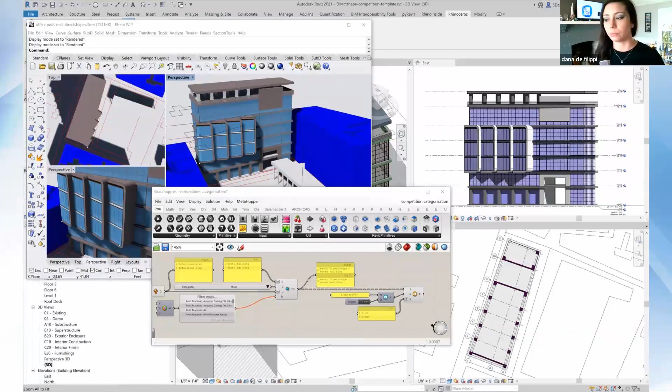So without further ado, today we have a really, really awesome presentation. Very, very excited about it. Rhino Inside Revit. And today we actually have 2 from McNeel & Associates.

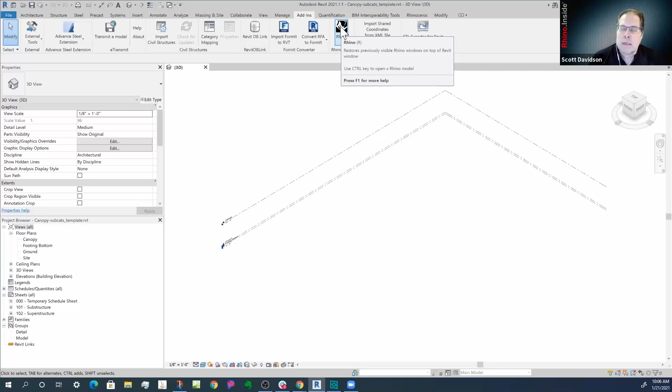Once you click on this, it'll go through the process and try to load Rhino and Grasshopper inside Revit's memory space. If it's successful doing that, it will come up with this toolbar, and there are different things you can do here.

You can start Rhino, which we're going to do here in just a second. We can import 3DM files directly using our 3DM importer as opposed to the one that comes with Revit. We can categorize things and put different direct shapes and categories, and we can turn off and on preview.

We can actually edit Python here. This is the Rhino Python editor, but it can access both the Revit API and the Rhino API simultaneously. So you can write Python scripts that include both APIs and both calls, and you have the whole Rhino geometry kernel available to the Revit API in Python and in C#. So we can start Grasshopper and some other pieces here.

We also have what we call a Grasshopper player, which some of you might be familiar with as players in Revit, so you can write commands with Grasshopper and just play them. Another important piece is that PyRevit has the ability to make custom toolbars, and those can include both Python and Grasshopper and Dynamo scripts. So you can create your own custom toolbars with all your custom routines using PyRevit and Rhino.Inside.

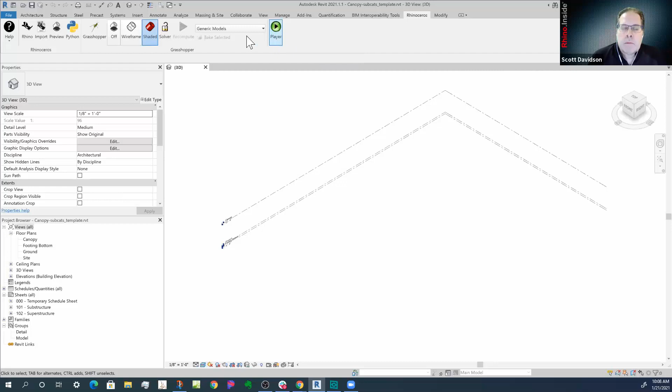Let me show you how this works really quick. When you start Rhino, you hit here and it starts up Rhino. This is just standard everyday Rhino 7, but it does know it's running inside of Revit. When I start up Grasshopper, there are a few new toolbars that come up when you're inside Revit. So this is Grasshopper running inside Rhino inside Revit, and it starts to understand the stack there.

You can see we have Revit primitives here, different kinds that we can access directly through Grasshopper. We also have a Revit Toolbar that comes up, which has things like being able to add beams and columns, deal with categories, create direct shapes, deal with families. We can interrogate elements, and we have a really extensive way of working with Revit materials directly, so you can actually use Grasshopper as a material editor in Revit, which is kind of fun.

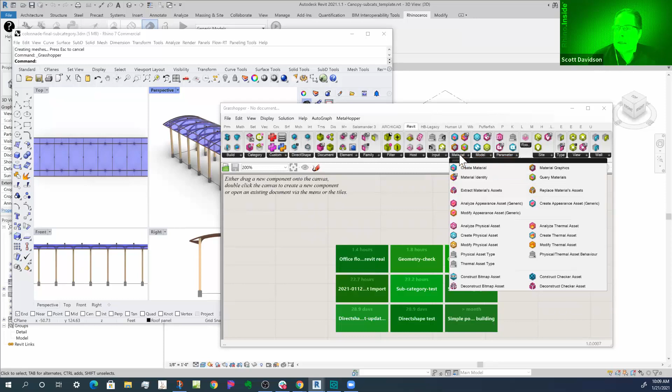We can deal with parameters and different types here. We have a whole section on walls because walls themselves are a fairly sophisticated category or family, so they have their own piece here. But these are things that we continuously add to, so there'll be more and more of those. That's where you find how you can do things in Revit.

Let me open an example here so you can get an idea how this works. I think we'll start with this one.

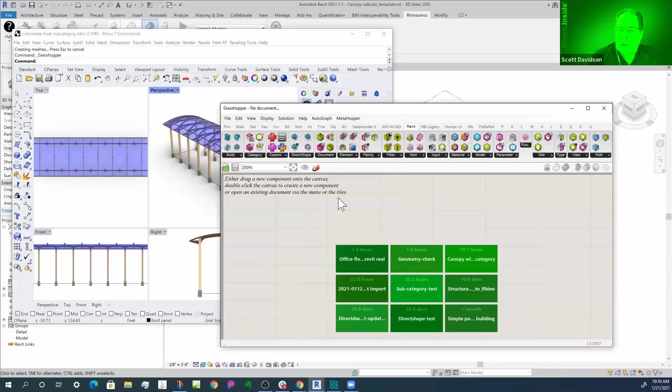One of the things we're trying to solve from the very start of this was people wondering, how do I get my Rhino geometry and move it into Revit? A lot of people use Rhino for design, so this was the initial question, and we can do that in a number of different ways.

This is one of the nice parts about this connection, you can do it with direct shapes. I have examples where we're throwing 100,000 elements into direct shapes. It's very quick, and you can use them in drawings really quick, for a competition or something like that.

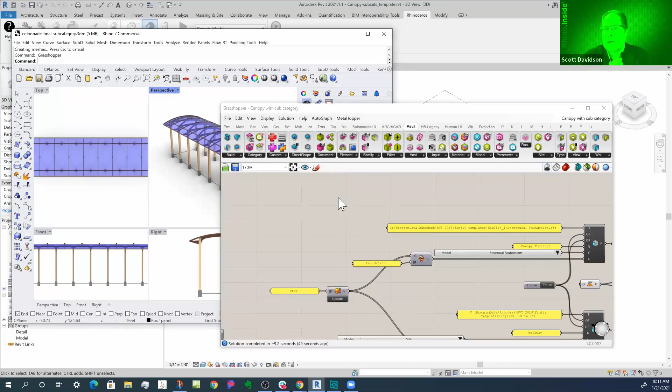But we can also be more rigorous or intentional on how we get things across. In this case, let's say this is a canopy that's custom built, and it's going to be dropped out on site.

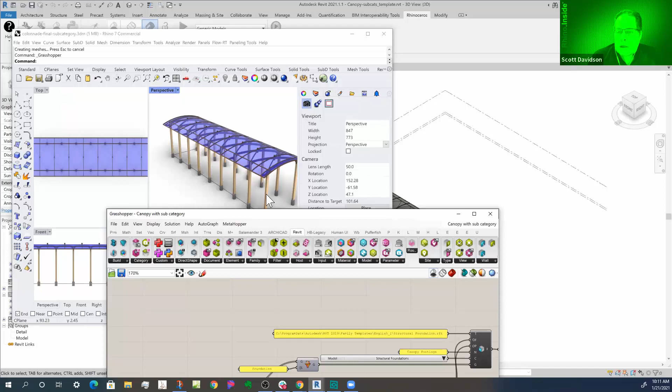One of the things I need to do is I have these footings that we need the footing person to put in, and then we're going to have this other piece fabricated and drop that in. So the Grasshopper definition can actually reflect that.

I'm using Elefront, which is a plugin for Grasshopper that's free. It goes through and allows me to select objects by type over in Grasshopper or Rhino. In this case, I'm grabbing all the B-reps.

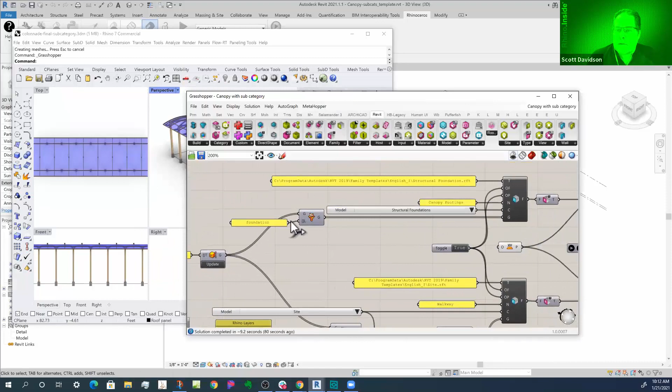I'm finding everything on the foundation layer, which are all these concrete pieces there. Then by going to family here, I can create a new component family. The new component family is going to be a structural foundation template.

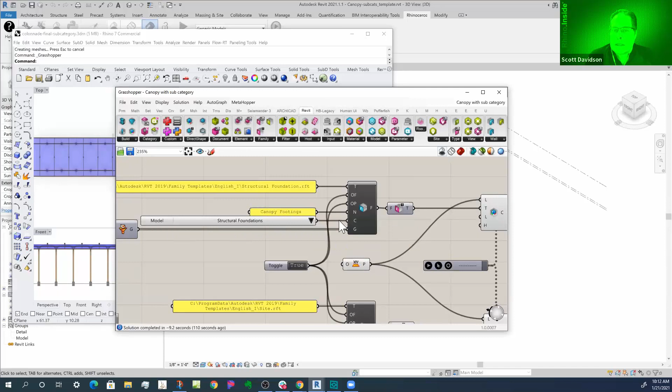You can see that, and it's in the structural foundations category. Then it's named canopy footings. So what it does is it takes all that geometry and wraps it up in a new family.

Of course, those of you familiar with Revit know that you don't insert families, you insert types. So we have a little unit here that goes and finds the types in this family, which is only one because it's a component family.

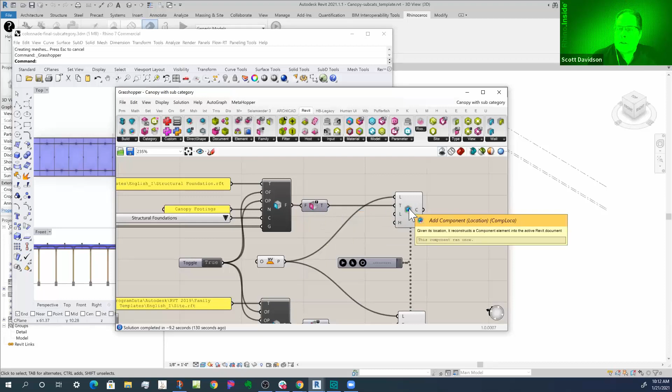Then what we can do is insert that family into Revit. You can see here that we have these footings here, they're a component family.

Each one of these could have been an instance of a single type, but in this case I was lazy and made them all one. But you can see we have the canopy footing here.

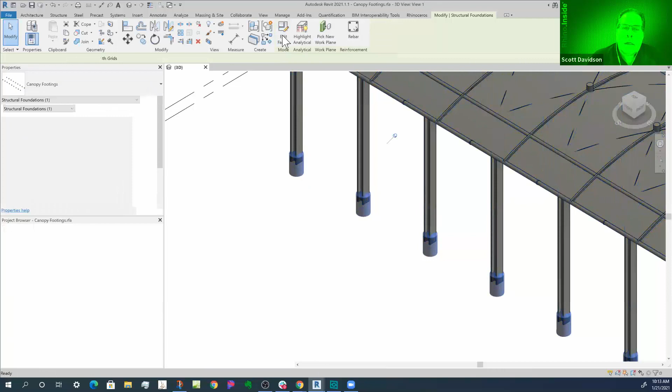It's a structural foundation type. What's really interesting here is because these are B-reps in Revit now, I can actually edit this family. I can grab these objects, and there's some light editing I can do to these, even if Grasshopper and Rhino weren't around - I could do this.

Now I'm not going to save this change because Grasshopper is in control right now, it'll just change it right back. And I can disconnect that connection. But you can see that I can make real families with real geometry through this.

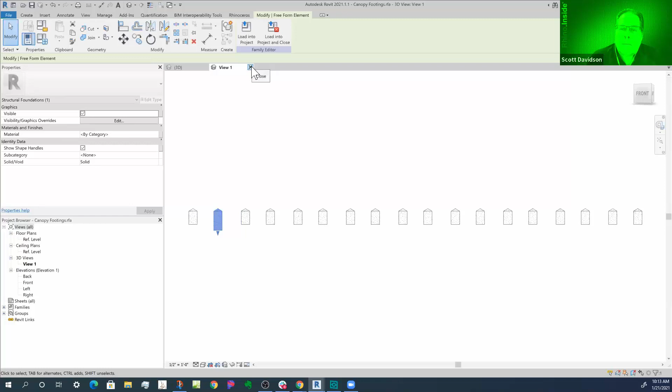I'm just going to close this, and we'll get back to the overall model, hopefully. So there we go. Now let's take a look back at a little bit more about this definition.

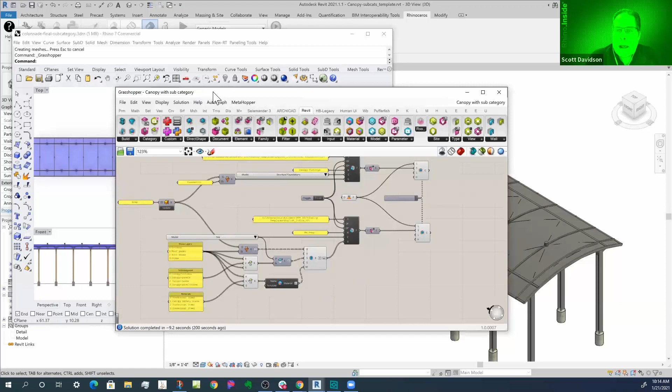I'm over on this side, and there's a lot more happening in the rest of this. I've got some roof panels and some columns and things like that.

So what I can do here is, using Elefront and some other filtering, we can go through and I can say, here are the layers of the objects in Rhino. Then I can map those to subcategories in Revit, and here's the subcategories I'd like to use.

In fact, I can actually assign materials to those objects too. I do a little sorting of those, and then I can create the subcategories if I need them.

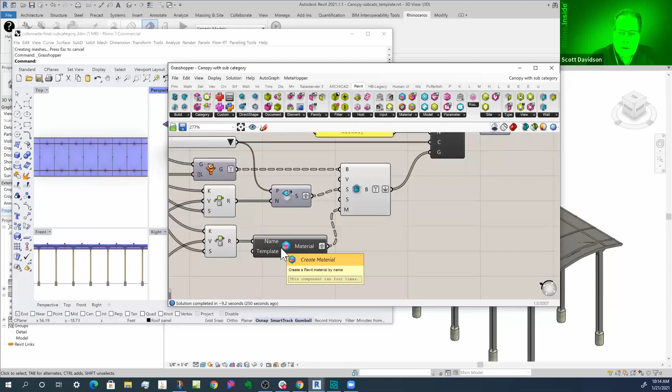I can also create the material names if they don't exist, they'll get created. Then I push those all into essentially a form mixer, which mixes all the subcategories with the forms and all those pieces.

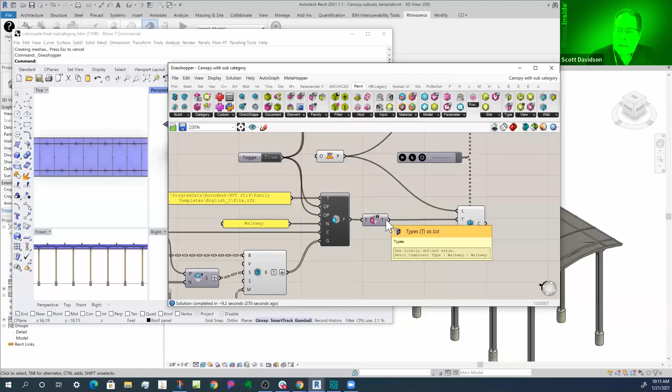Then we get to the family again, a new family. This is on a site family because I'm going to use subcategories, so I need a category or family I can use subcategories on. We're going to call it walkway. I mesh that all up, find the type like I did before, and insert it. What I get over here is a family with all the different subcategories and pieces like that.

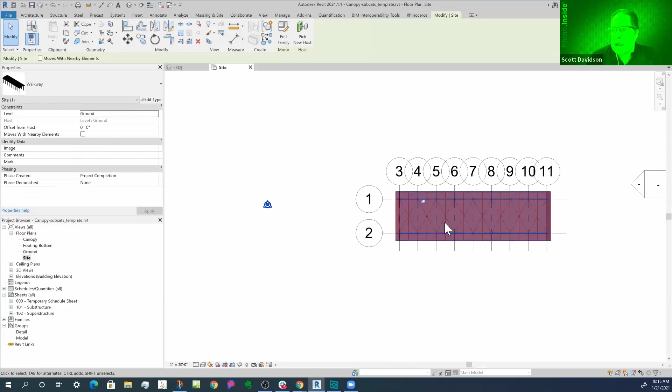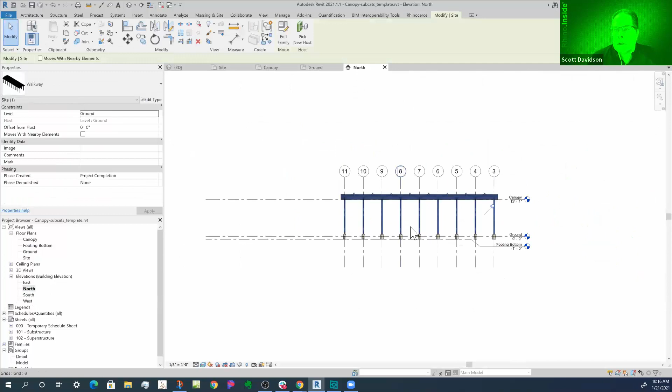You can see what I can do here is go through and, using subcategories, let's see what I get here. I can go through and actually change graphically how these things look, based on the different subcategories and using view filters and all those things. You get to really start to inform the model, the BIM model, create the BIM model in a way that works well in your Revit schema.

That's one of the big advantages you have here. And of course that can change over time - you might have floor plates that are going across and are official, but you might still be working on the facade. So the facade might be direct shape objects which you're going to just use temporarily until the facade kind of settles down in the design. So there's a lot of options here for your workflow.

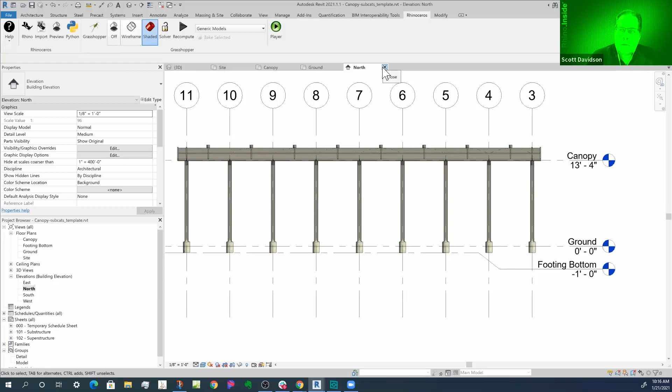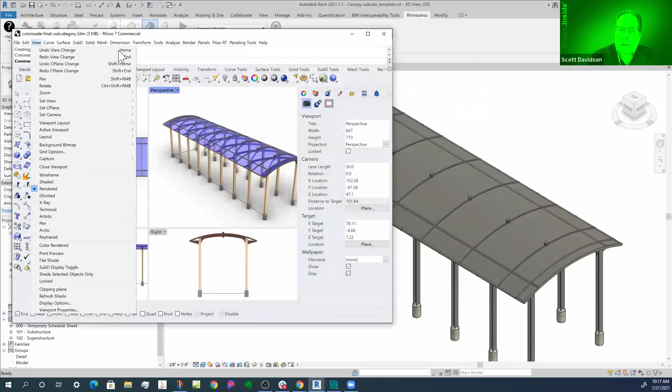Now, we don't just do forms and we don't just do direct shapes. We can also drive native families, system families. So I'm going to just jump out here and show you how we might do that a little bit. I'll close this, and I think we'll leave that one open for right now. Let me close this and get on to a different template here.

So when you move on to doing native objects in Revit, a lot of times instead of just moving the geometry over, you're actually going to move a piece of geometry in Rhino over that has - and by the way, this is not just the geometry, this is all the parameters too. So you can add all the data that you want from the Rhino model into the Revit model if you want. But you might just move a curve over, for instance.

So let's open that up a little bit and take a look at that. So I'll open, let's do - yeah, that looks about right. All right, so you can see here, instead of having all the geometry or the final geometry, we just have some curves and points and things like that.

And so I'll go to a different way. This one's going to, instead of just taking geometry over and making families, it's going to go and actually drive some pieces, some native objects, some system families. So in this case, I'm going to take some floor curves and move along here, find all the curves on floor and all the curves on roof. And then what we're going to do is I'm actually going to find the name on those curves, find the elevation of the curves, and create a new Revit level.

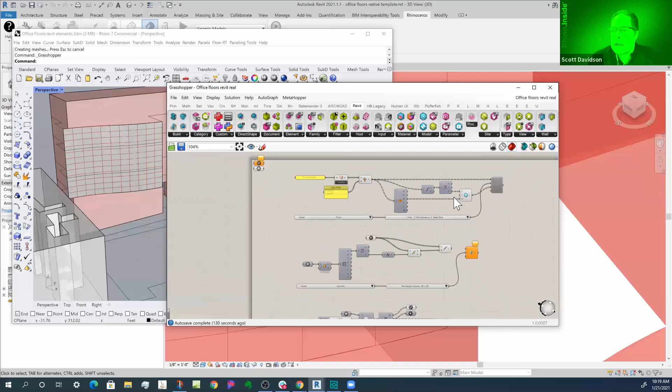So we go over here - I have our level. I can add a level and then it creates that level, named that. And at the same time, it's going to create a floor, which is a native floor using a standard type in Revit. Here's all the types that happen to be in this model. And then I'll just enable this here.

And so it's interesting what happens here. So it takes those curves, which I could have picked, but I just filtered form on the layer. It creates those curves, or it takes those curves, it creates the native floors in Revit here. You can see they're native floors. You can't tell that these weren't just created by hand in the first place, actually, except Grasshopper's in control at this point.

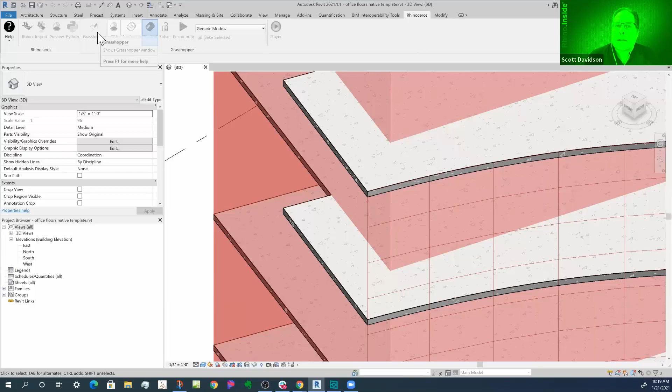And what's interesting too is then those floors are actually previewed back in Rhino. So the curves are in Rhino, the floor is created in Revit, exists in Revit, and then it's previewed back in Rhino, which is kind of fun too. So you can see how they're both updated all the time.

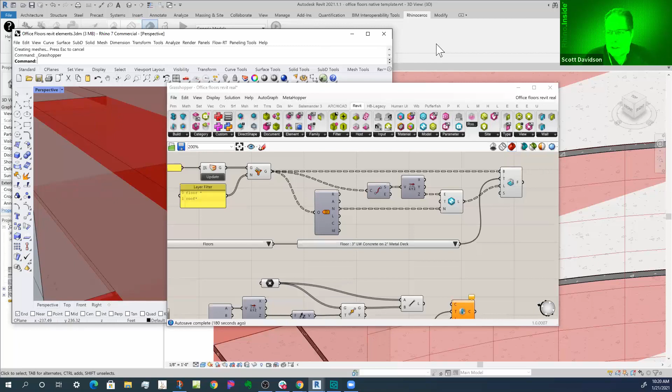What's nice about this is, if we were to disconnect Rhino and Grasshopper from this and somebody wanted to change this, I can go and, like I did before, pick on this. I can go and edit this floor. Let's see here.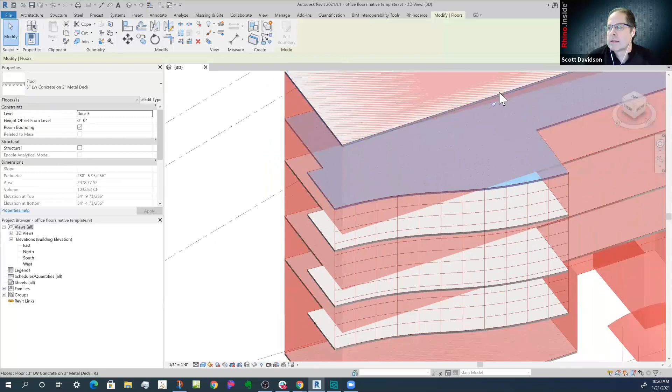Oh, I can't edit the floor right now because... Scott, I think you have to unpin it first. Oh yeah, thanks, I got to remember all these things. That's an important piece of this: when Grasshopper creates objects, everything in Revit is pinned. So if you want to edit it, you unpin it, and that way you can get to it directly.

Then we can edit the boundary, and you can actually see if I click on this, it gives me the dimension, and I could edit that, and it actually edits with Revit. That originally, of course, was a Rhino curve. But let's say you disconnect Grasshopper and it's gone downstream in the project further, you have this kind of ability depending on how you make the thing.

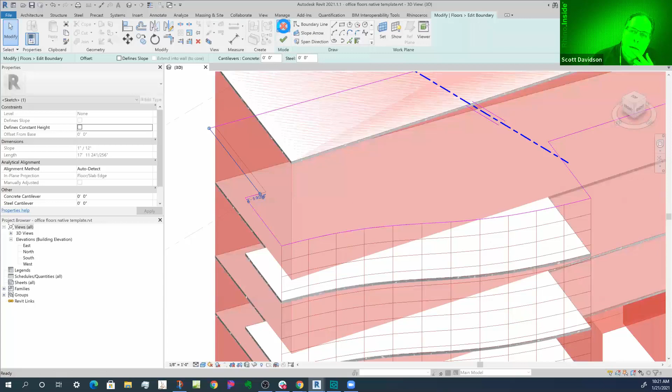I'm not going to save that change because Grasshopper is actually still in control. But we're just going to do that, and I'll cancel that edit. But that is the kind of level that you have.

So we can do floors, and these levels here were created by Rhino and Grasshopper. Grasshopper named them and created them on the fly, so you can keep all that in sync. This also goes the other way - you can take levels and bring them into Rhino if you want to, all that kind of stuff.

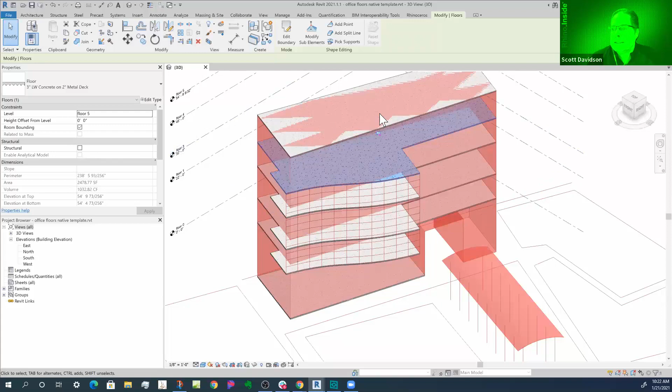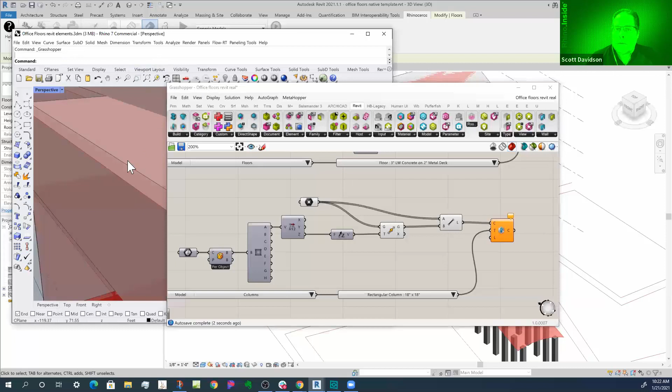Just the last piece I want to show here before we get to your questions and answers, because we want to make sure you have a lot of time to do that. We can do things like take some points out of here and create some columns with them. The points that were in Rhino, you can see right here, just created the columns.

What's fun here is if I'm in Rhino and I edit this roof height, you can see that the columns in Revit respond. So you can set up some active ways of these two working together.

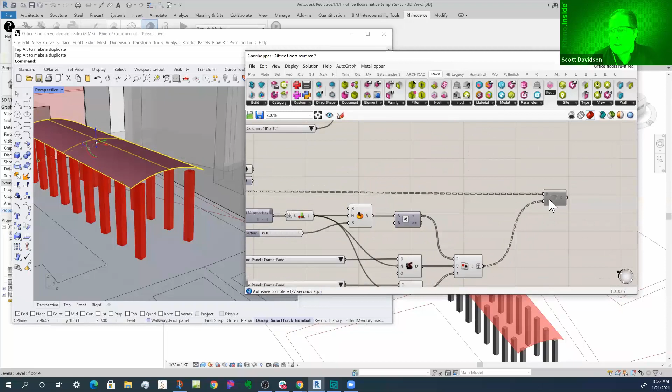Another way you can do this is if I want to drive adaptive components, we'll just go in here and I'll enable this. So we can drive adaptive components through Grasshopper.

And that'll just take a second to populate. And so you can see that in Grasshopper, or in Revit, the adaptive components were created here.

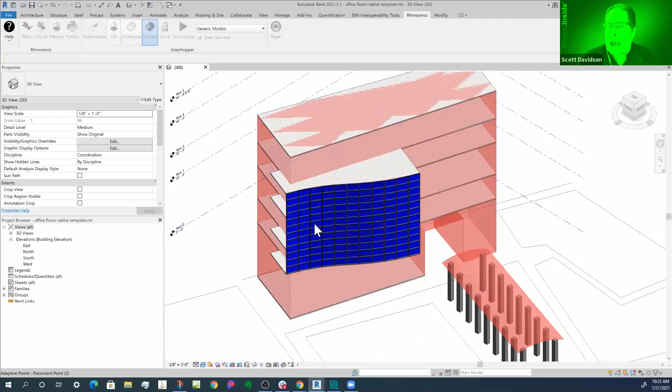Excuse me. And then if I come in here, we can have some fun with this. These are previewed. Instead of using the same adaptive component, what I can do is have Grasshopper randomly place two different adaptive components.

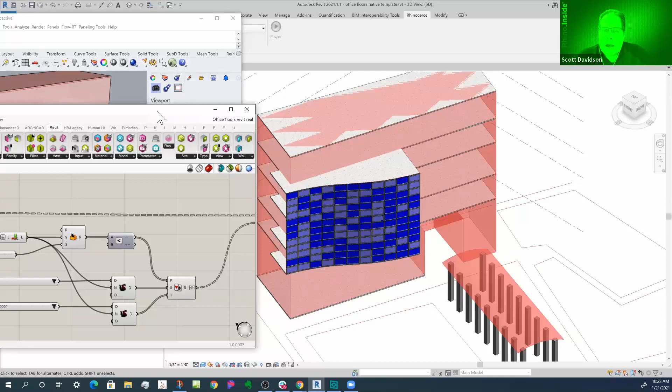You can see it can just randomly do this, or you can have it react to where it is on the facade and have Grasshopper select different adaptive components on the fly and edit those things. I have a little slider here that will look at different random patterns you can go back to. So in this case, this is Grasshopper driving Revit's adaptive components in real time.

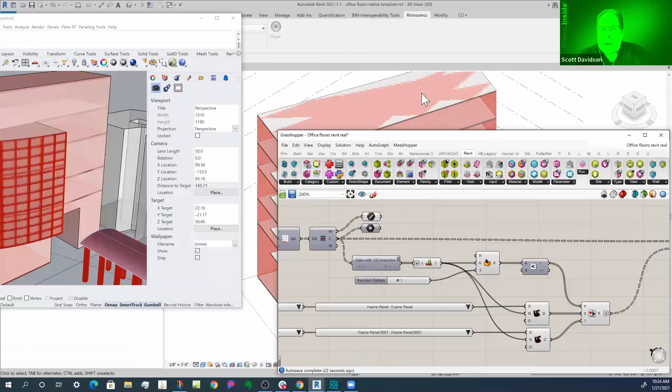There's a lot of options here, but what's nice about these methods is these are system families, standard Revit system families, creating real Revit objects. So Revit's doing the generation of the geometry, and then all the parameters that come along with it - that's all possible. So that's just a quick overview of some of the things you can do.

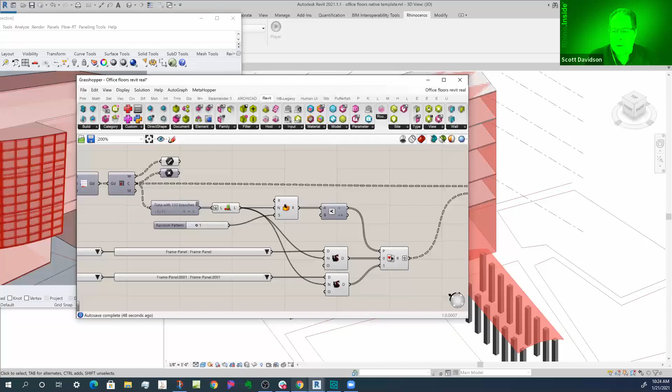If you're interested in more of this, the Rhino.Inside.Revit website is the place you want to go. I want to point out a few different places - there's the Getting Started article, that's where you can get it started, talks about install. There are guides - these guides talk about, for instance, how we deal with walls in Revit, how we deal with doors and windows, adaptive components, rooms, areas and spaces. We're still working on this website, but from right here there's also Rhino to Revit.

This is the most popular guide by a long shot. It talks about how to create direct shapes, how to create loadable families with subcategories, and how to do native Revit elements. A lot of what I showed here today is in this guide.

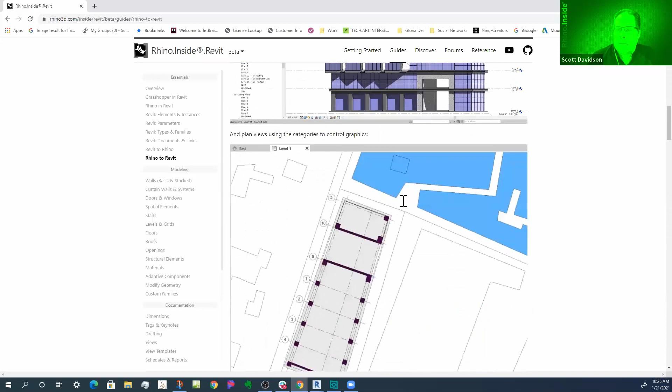You can go through this guide, and it also talks about the different pieces and what you can do. I highly recommend, as you're exploring this, get to this guide, and you can work from there.

Another thing we have, which this video may end up on at some point, is if you go to Discover here, there's lots of different resources from people in the community, different demonstrations, different tutorials, different discussions about how it's useful, all those kinds of things. Some people you will recognize because they've been on your cast here.

We continuously are adding to this, so that's the Discover page, a great place. You can see that Marcello, who talked about this a few months ago to all of you, has a Dynamo and Grasshopper for Revit manual, which includes Dynamo too. That's right here, but there's a lot of other resources too.

I just want to make sure people knew what the important selections were. The forums, if you want to get a hold of us, are right here, and we're on the forums all the time. So anyway, that's what I have for this presentation.

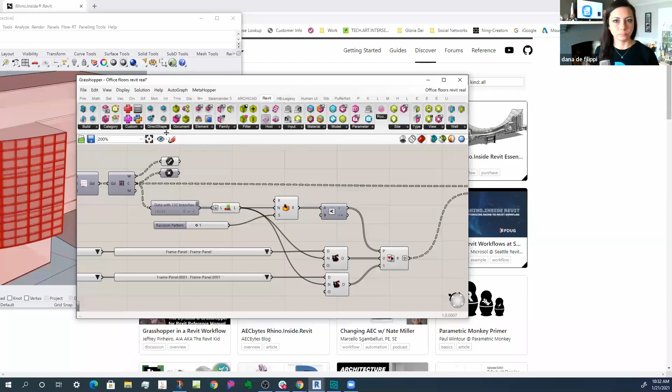Somebody's asking, confirming Rhino Inside only works with Rhino 7. So Rhino Inside depends on a new piece of technology that's introduced in Rhino 7. It's not going to work with Rhino 6.

The developers for Rhino 7 sort of took apart a good piece of Rhino and put it back together in a different way, so it could be embedded in other applications as well as an add-on. Rhino Inside Revit was built on this technology available in Rhino 7. It's really asking Rhino to load itself inside the Revit environment, and it also launches Grasshopper. This Rhino Inside Revit piece is really the add-on for Revit that can talk to the installed Rhino you have on the machine, get it to load inside Revit, load Grasshopper, and it also adds all these components that Scott showed you. These are the components that come packaged with Rhino inside Revit to support Revit workflows inside Grasshopper.

We joke about it all the time, but there's a little secret: Rhino actually is Rhino inside Rhino. It calls itself to load itself. So what's nice is that all the technology we're using for Rhino inside Revit is something that we use ourselves for Rhino, and so it allows it to get tested and keeps it up to date, which is really nice.

There's another question about work sharing that Dan is asking. These same work sharing rules apply. As Scott showed you, our focus with Rhino inside Revit is to build as many components and workflows that support creating and querying native geometry in Revit. So the goal is not to bring all these crazy shapes and geometries inside Revit that Revit really doesn't understand. The goal is to give you the amazing Grasshopper and Rhino geometry engine that exists outside of Revit, bring it inside the Revit environment so you can use this visual programming language and geometry engine to generate a lot of the content you need inside Revit automatically, all the walls, levels, floors, and all that kind of stuff.

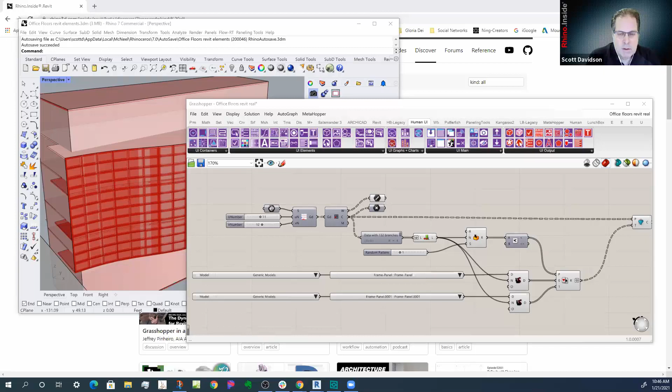So if you install and take a look at Rhino inside Revit, all the components we have in the Revit tab, you'll notice we have a lot more query and analysis components compared to create components, as we like to call them - components that let you create native Revit content inside Revit documents. We have plenty, but there's still a lot of work to be done in that department.

Part of the reason is that getting stuff inside the Revit model in a way that Grasshopper can drive it, and is intuitive for the user, so they can tell Grasshopper, hey, it's okay, I can take care of this piece of content from now on. And also, when another instance of Grasshopper opens on somebody else's machine, it can recognize that piece of geometry, that piece of model that is Revit native, is not something Grasshopper itself creates - it asks Revit to create that. So that has always been a challenge.

We're calling this feature element binding - the way Grasshopper remembers the content that it creates. This feature is in the testing phase, so we should be able to publish it out soon. Once this feature is inside Grasshopper, we'll be able to focus on a lot more create components, because now we have element binding as a backend, and it would be accessible to all the scripted components we have.

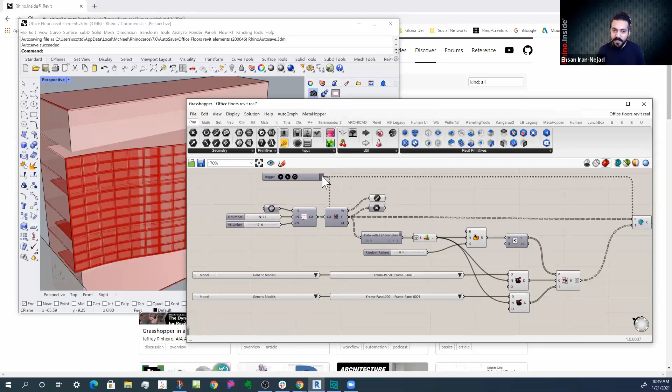Scott, do you mind showing them the trigger component that's new to Grasshopper? So this trigger component, I think inside utilities, this one - you can tie it to any other component in Grasshopper, and it specifically works very well with Rhino inside Revit aware components. It ties the actual function of that component to that play button that's there.

So you can do a whole lot of calculations and geometry modeling inside your Grasshopper definition, check it out, make sure it's good, and then hit play and let the rest of the definition take care of building all that stuff inside your Revit model. You can nicely separate these two pieces from each other, or have multiple pieces even inside your definition. So Revit isn't a bottleneck all the time, because it takes more time for Revit to generate this stuff - you can play with them a lot faster in Rhino and just click on it when you're ready.

In these demonstrations, what I do is I might take the Revit component and disable it, and then when I'm ready, I'll just enable it, and it'll generate the Revit objects. So you can do it that way too. But this trigger is pretty nice because you can wire it up to as many components as you want, and you can trigger them all at the same time.

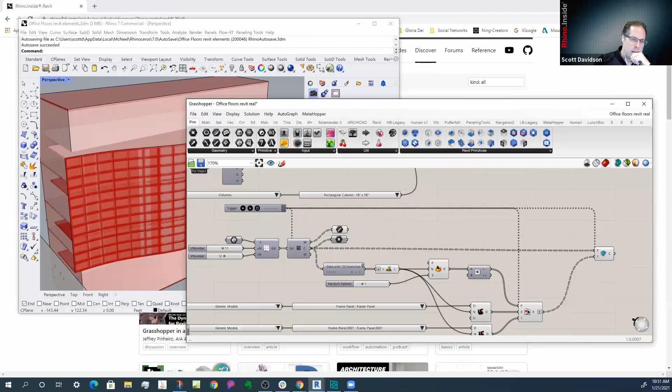One other question that I have, especially because we have a lot of Dynamo users like myself on the call. I feel like when I ask that question, especially to computational users, it's actually the exact opposite, right? They started in Grasshopper and migrated to Dynamo. So any tips that you have for us Dynamo users that want to learn Grasshopper, maybe some direct translations that would help? I'm going to share some links that I know for the Grasshopper manual, of course. I'll share that link in the chat, but anything else would be wonderful as well.

Yeah, so I'd recommend jumping in with both feet. Let's look at the Discover page. I guess the first thing to understand is that the guides here are broken down in a very obviously Revit-like way. So it's a good place to start, depending on how you want to approach things, because this is mostly written by Ehsan. So you're going to find a lot of these things here are going to make a lot of sense to you from just a Revit point of view, maybe not as much of a Dynamo point of view.

But if we go to Discover here, this manual, of course, is a great way to learn Dynamo too, 200 examples that include both — on one page it's a Revit or Dynamo example, and on the opposite, facing page, is a Grasshopper example of the same thing. So it's not only a great way to learn Dynamo and Grasshopper, but it's also a great way to kind of see how they in some ways parallel each other, and where they parallel each other exactly, and where you'll find some definitions are a little bit more complicated in Dynamo than in Grasshopper, or vice versa. So that's one place to look.

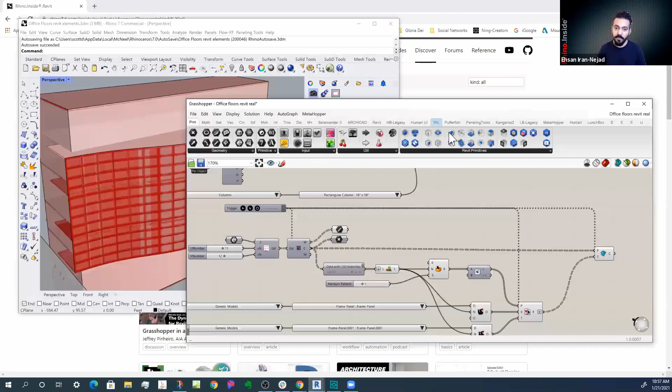The rest of the create components are also coming—like that tab Scott is showing, it's all material components. It only supports the generic right now, but we're testing this with users to make sure the workflows are comfortable. Then we'll add all the advanced shaders that Revit supports very quickly too.

One of the crazy workflows we've been working on is that you can take bitmaps and colors, lists of colors, and generate material libraries through Grasshopper in Revit. Because Grasshopper has plugins for V-Ray, you can actually generate V-Ray materials and generate them both at the same time so they're synced up. So you'd have Revit materials and V-Ray materials that match each other as much as they can between the two. You can grab materials out of Revit, or generate new materials on the fly, and mess around with their color and the bitmap assets they use.

The embarrassing part here is we actually in Grasshopper now have better coverage of Revit materials than we do of Rhino materials.

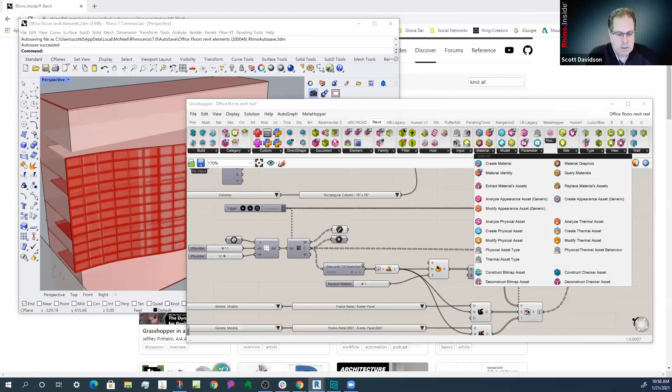The thing that's really important about all this is that it's all driven by your requests. So as you try it, please get back to us, because it's the only way we really move forward with this. If you come to the forums, I'm on here, Ehsan's on here, and Kike, another developer for us on Rhino.Inside.Revit—we're all on here. Please jump out here and give us the feedback. Ehsan can often whip up quick Python components to help with your problem in the short run, and then we can get them more officially into the product if we need to later. So highly recommend you come to our website, get it downloaded, and participate on the forum, because it's really critical to helping us—meaning you and us—get this product to be right for what you need.